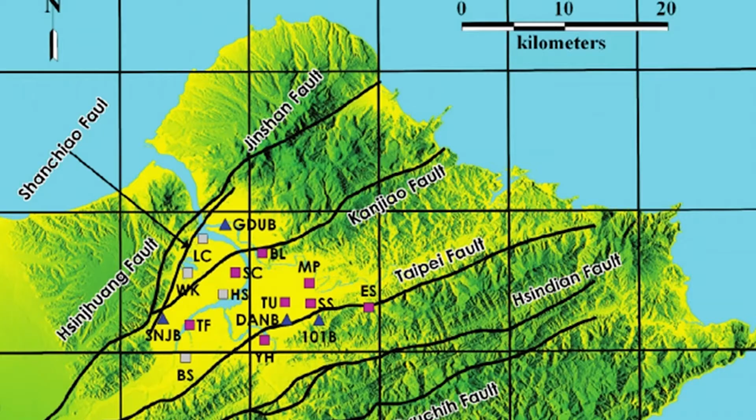Taipei City is an inhospitable place to build a skyscraper. Beneath the earth, a thick layer of soft clay demands a uniquely designed foundation, while above ground, the threat of two of the most powerful forces of nature, earthquakes and typhoons, require a level of engineering and construction never achieved before. Taipei 101 was the only super tall building in the world designed in a seismically active zone.

Our team has been studying this next level of engineering and construction technology over a semester, about how engineers confronted the power of nature. Today, we are going to go through the design issues one by one, from design to the completion of the building. Let's start with the seismic design.

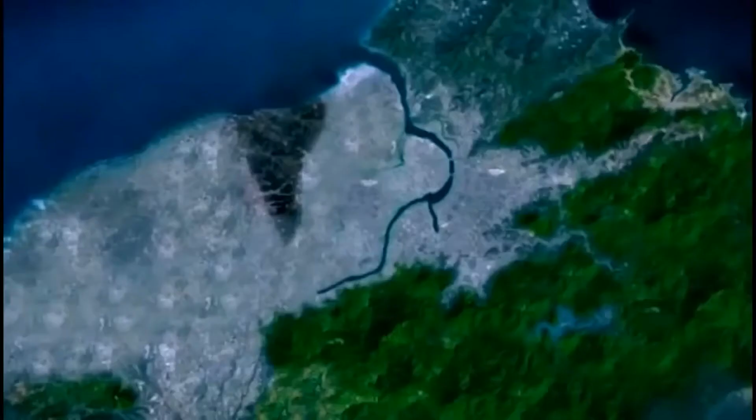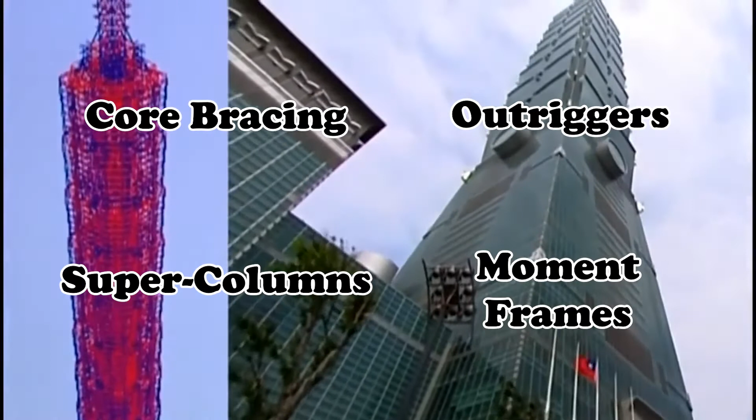Keeping the location of Taipei 101 in mind, it is easy to see that earthquakes were a worry when designing the building. To overcome this, Taipei 101 ended up having special structural members compared to ordinary buildings: core bracing, outriggers, super columns, and perimeter moment frames with reduced beam sections.

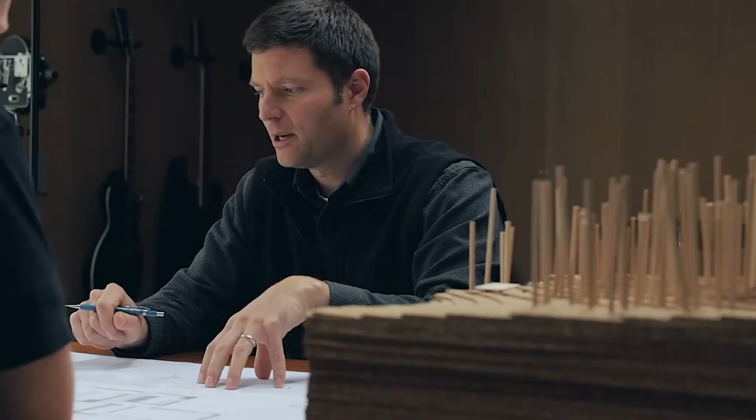Bringing such a tall building into reality was a challenge at that time, and engineers had to figure out new ways and combine methods to successfully build Taipei 101.

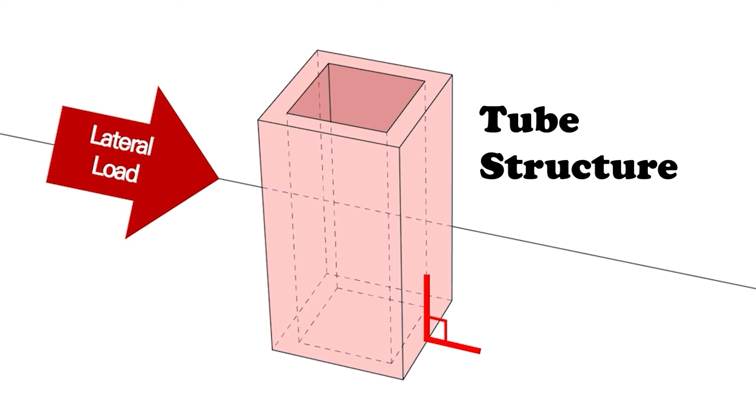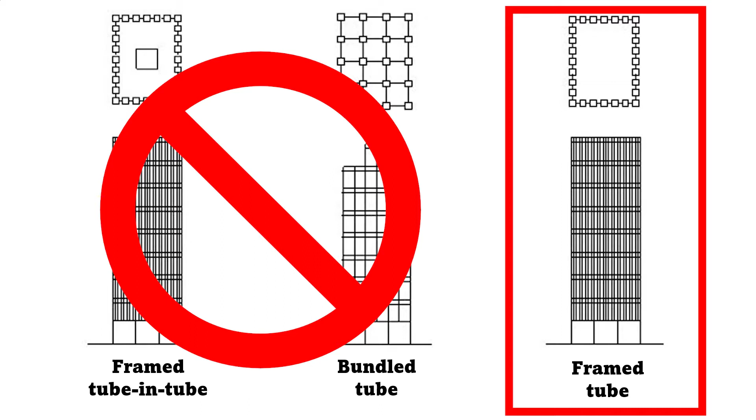The first structure they thought of was tube structures, which were highly reputed for resisting lateral loads in skyscrapers. There are mainly three types, and the first two were eliminated since they took up too much space inside. So the one that was left was the framed tube system, and it was nearly considered the best, only if three major drawbacks when applying this to Taipei 101 were solved.

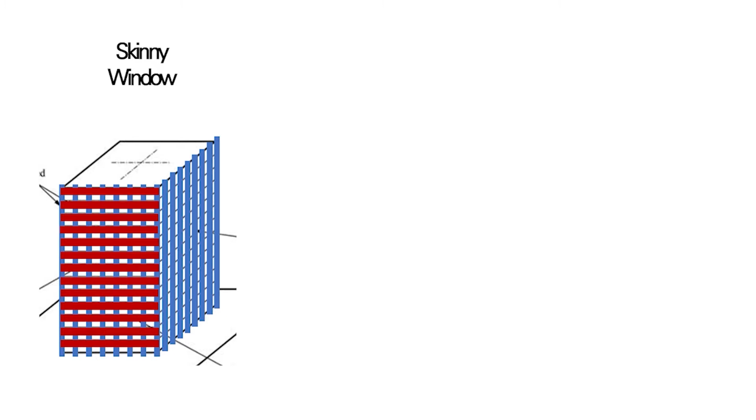These drawbacks were: blocking the wide glass expanses desired by the owners, requiring indirect load transfers at the setback atop each module, and involving intrusive internal beams to connect building faces across the sawtooth corners, which will be explained later.

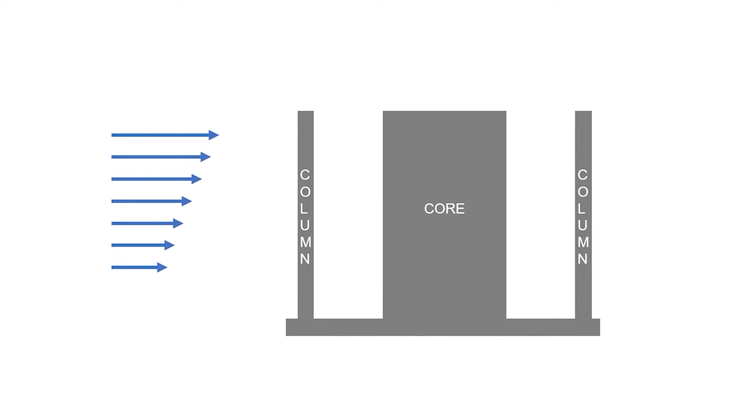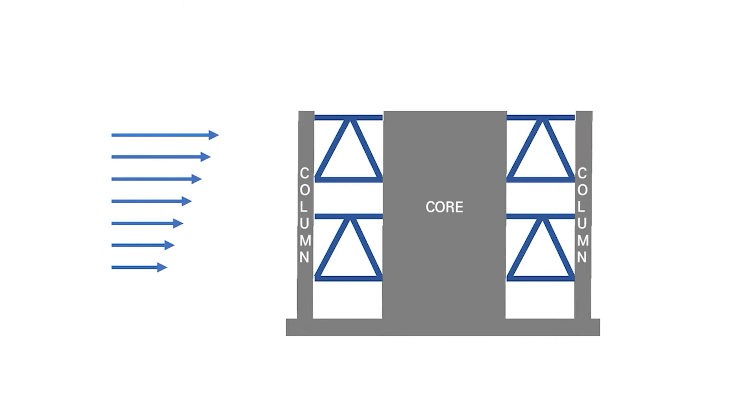To overcome these, engineers came up with a system including outriggers. Generally, when a building is exposed to lateral forces, it bends in the direction of the force. However, if an outrigger is installed, it resists rotation of the core by improving stiffness and reducing overturning effect, which reduces lateral deflection of the core.

This outrigger system solved not only the problems that framed tubes had, but also made it possible to change the shape and inclination of the exterior skin.

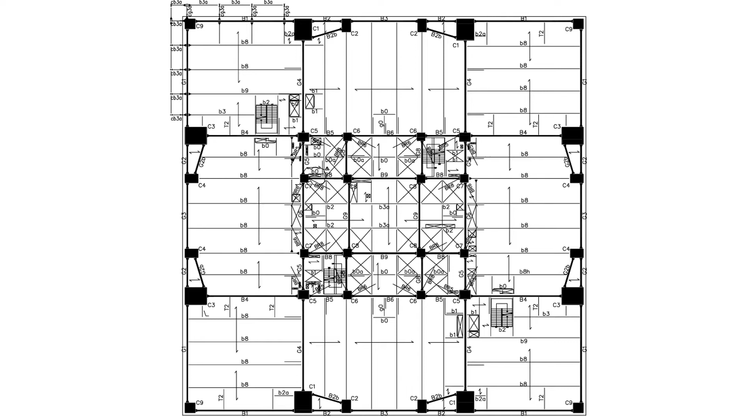Two more structures were used to bring this to reality: core and columns. In the case of Taipei 101, the core exists as a special concentric braced frame. It is the kind that focuses more on ductile behavior and inelastic deformation, which is key to preventing the collapse of the building against earthquakes.

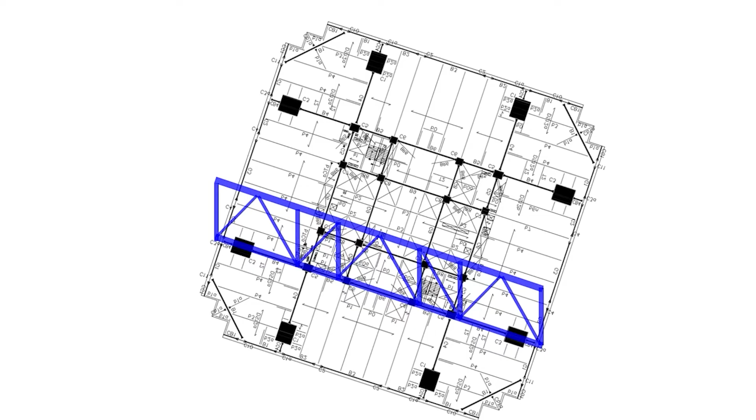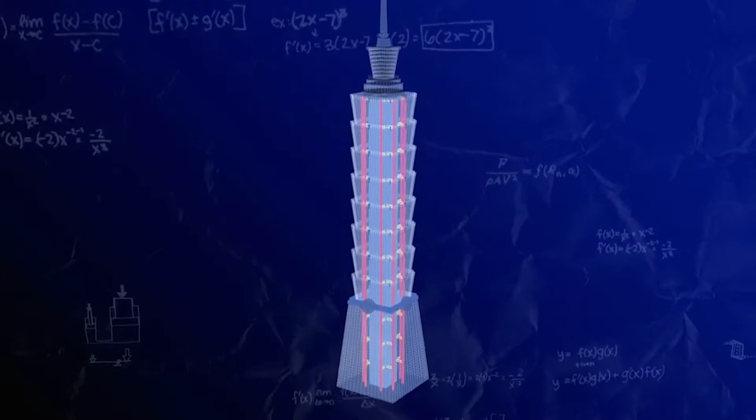Super columns take place along the perimeter, connected to the core and directly to the outriggers. In addition to this, an ordinary-looking moment frame is used.

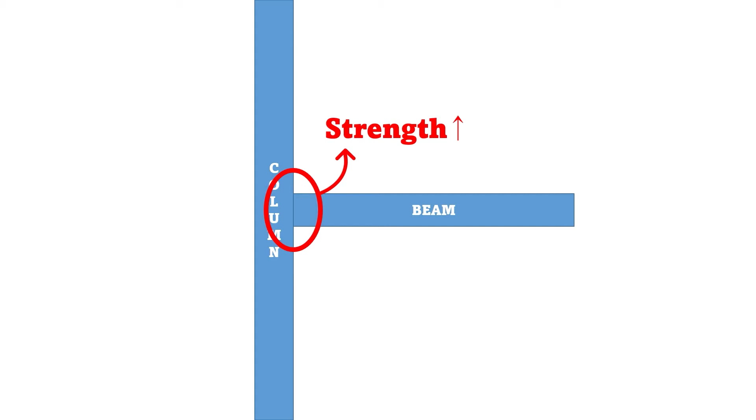A strong earthquake causes plastic hinges at the end of the beam in a fully restrained moment frame. So usually, to counteract these plastic hinges, the strength of the beam-to-column connection is enlarged. But since this method costs too much, Taipei 101 applied a dog-bone beam, reducing the beam section.

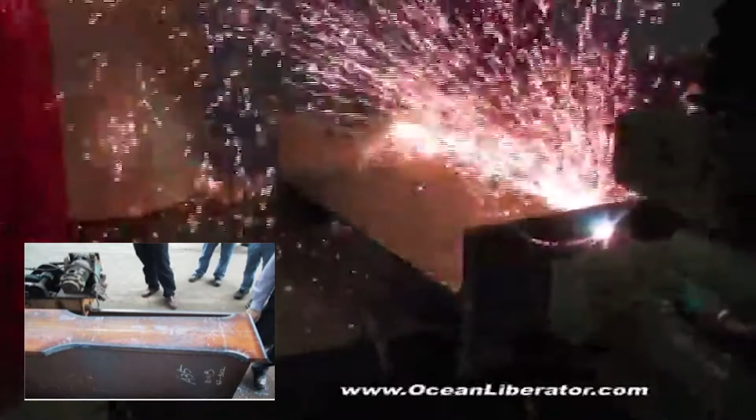It might seem counterintuitive that removing a portion of the structure improves performance. But the dog-bone results in only a small reduction in lateral strength and stiffness of the frame, and provides a large increase in ductility, the key to surviving strong earthquakes.

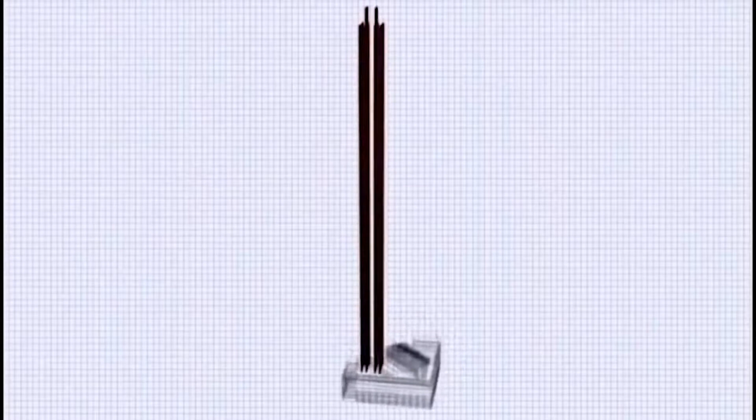One big structure, consisting of braced core, outriggers, and super columns, is grouped as the megaframe, the one I mentioned earlier. The braced core and perimeter moment frame is called the special moment resisting frame. Building to the height of Taipei 101 requires not just one, but both of them, as a dual system.

In Taipei, the environment that needed to be handled was not only seismic problems, but also the wind. When you put a tall building on an old secondary earthquake fault line, which runs nearby here, and in a place where you get significant typhoons, that just has major challenges.

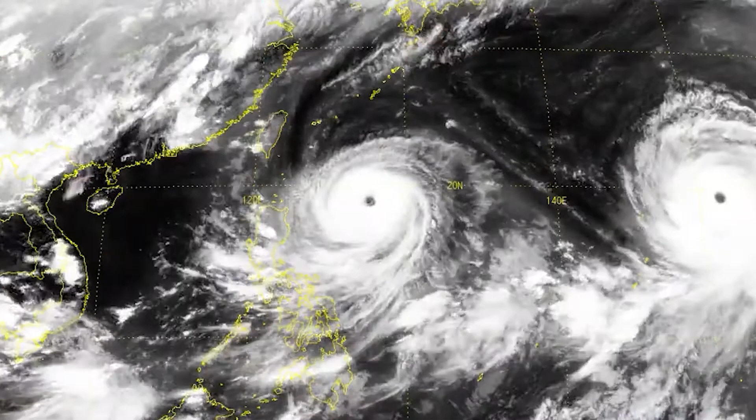Taipei 101 is influenced by aggressive typhoons generated on the equator every year. Typhoons accompany strong winds up to 200 kilometers per hour. Not considering it carefully, the building might be in danger under the threat of wind.

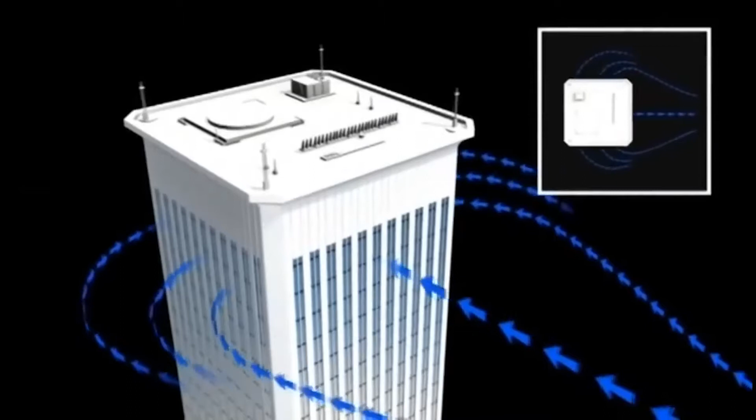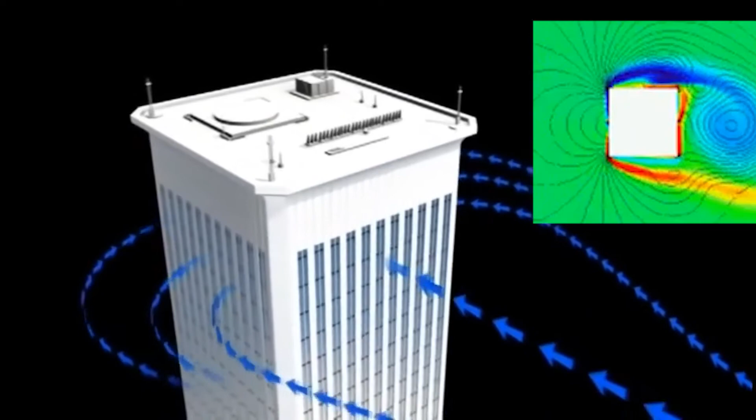When a thin, long building like Taipei 101 comes across wind, spiral-shaped airflow, called vortex shedding, causes a building to sway in a perpendicular direction of it. When the frequency caused by the vortex shedding becomes equal with the natural frequency of the building, the magnitude of the sway increases amazingly. In general, we make the structure very stiff against wind.

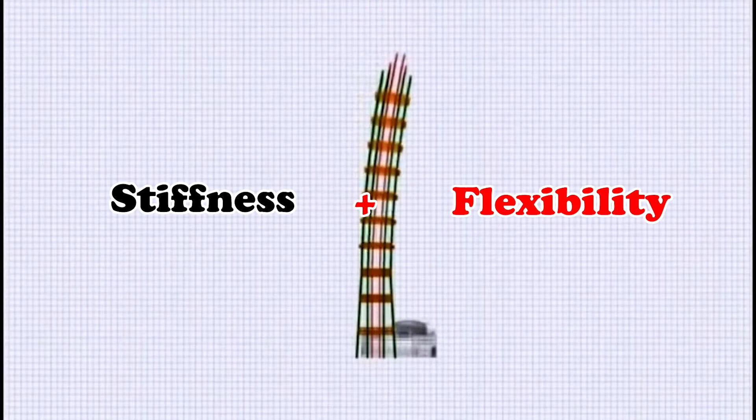But in the case of Taipei 101, it also must be flexible enough because of the earthquake.

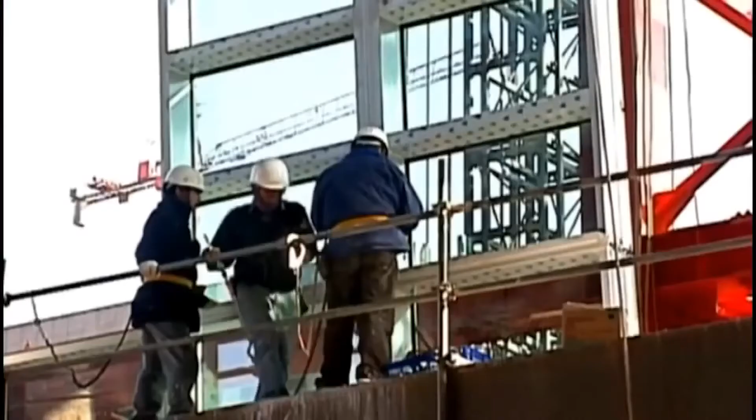The engineers came up with an idea of redesigning the exterior of the building. Designing the facade aerodynamically, they could restrain the influence of the winds to the tower, including vortex shedding. The softening corner method was applied between the aerodynamical designs, sawtooth, and a double notch. It reduced crosswind response effectively, showing a 40% reduction in wind force.

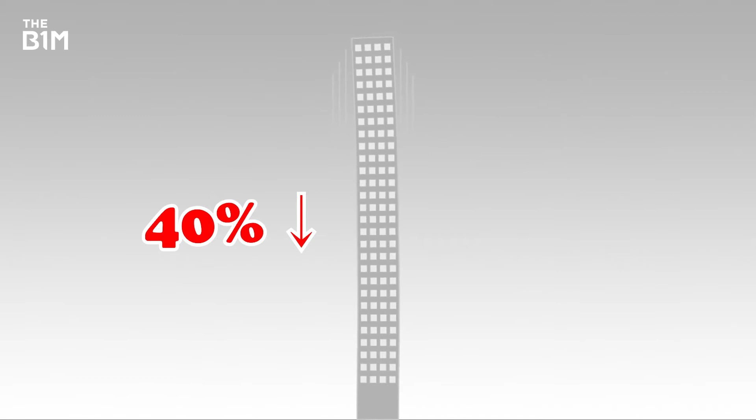Although the influence of the wind reduced, the energy grows while the sway builds up. To prevent the energy building up, a tuned mass damper, TMD in short, is used in Taipei 101. It is extremely heavy, weighing 660 tons.

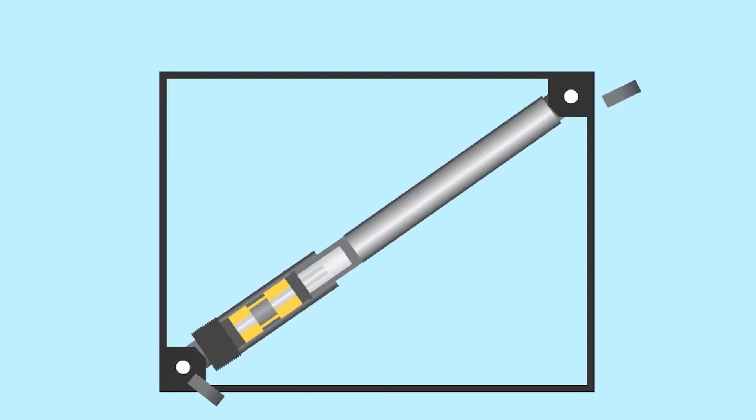This massive damper acts exactly during the same period and exactly in the opposite direction. The reversed movement of the tower and the TMD cancels each other. Under the mass block, the eight viscous dampers transfer the kinetic energy to thermal energy. By even controlling small vibrations caused by the wind, it presents comfort to users inside.

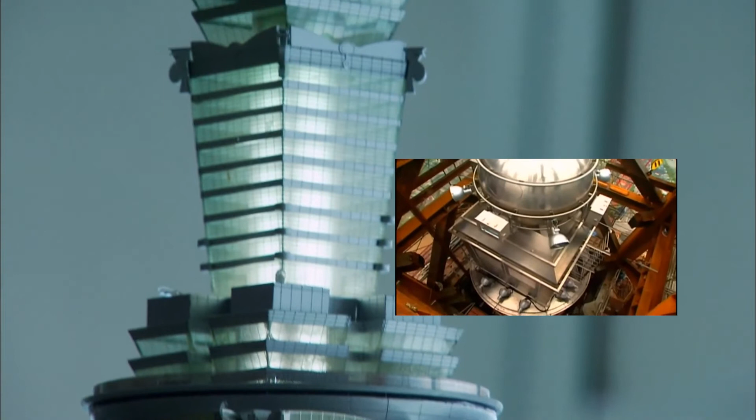Additionally, two small versions of this tuned mass damper, following the same principle, are located near the pinnacle, preventing wind fatigue on the steel frame.

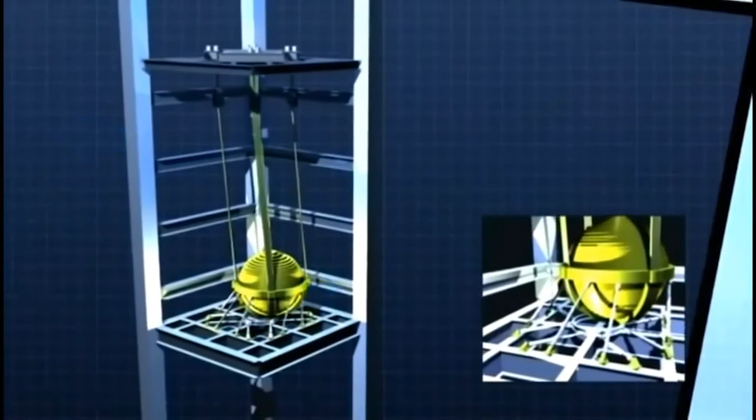Taipei 101's unique megastructure and damper resist earthquake and wind shakes. But all of this is meaningless unless a huge building has a solid foundation that exists on solid ground.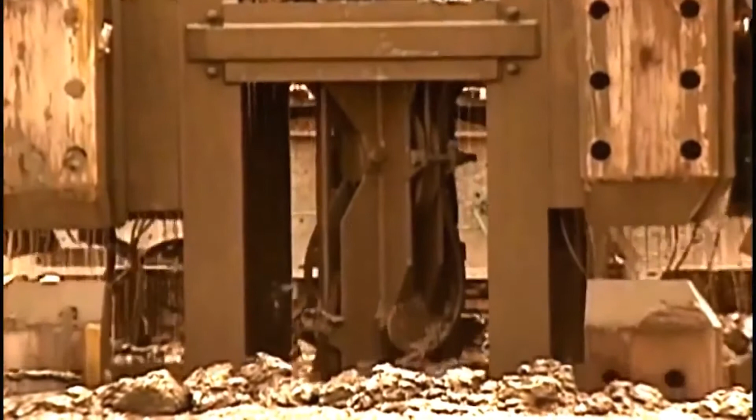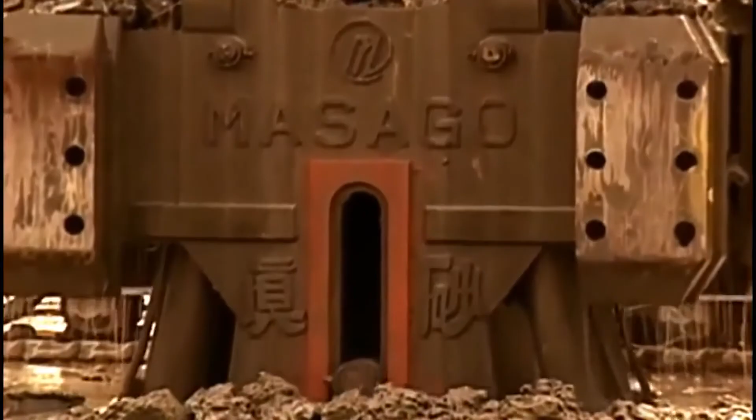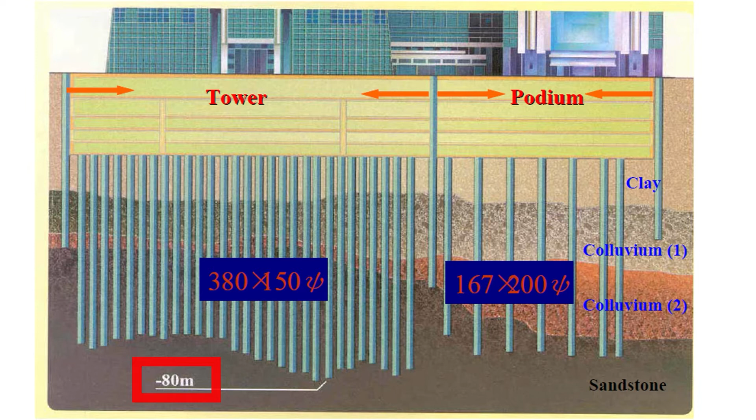Due to the change of the sea level over hundreds and thousands of years, Taipei Basin was filled with soft soil and clay. In order for one of the tallest buildings in the world to stand, it had to break through an 80-meter thick layer of soil and find solid rock beneath it.

As a result, it took 15 months to prepare the foundation alone, and about 700,000 tons of soil were removed from the site. It was designed to be held on underground bedrock due to the unstable ground, and it secured under 23,000 square meters of concrete slab through 380 reinforced concrete piles.

For Taipei 101, 3 types of foundation were considered: caisson, barrette, and large diameter bored piles. They all show high resistance to large lateral loads. However, among these, bored pile was chosen to transfer the loads downward in Taipei 101.

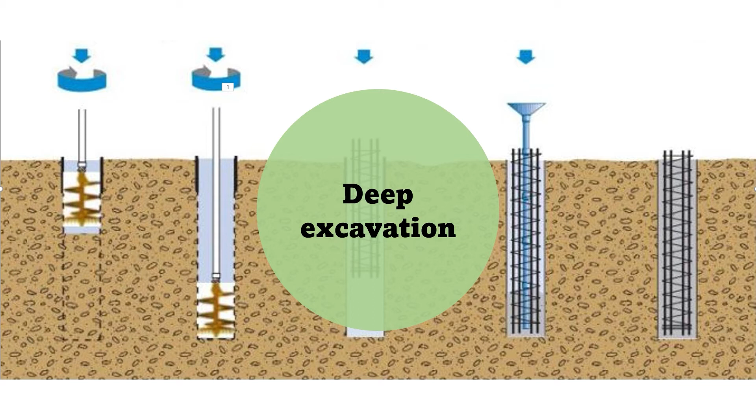Based on full local experience, deep excavation was easily achieved. These characteristics made the foundation much stronger.

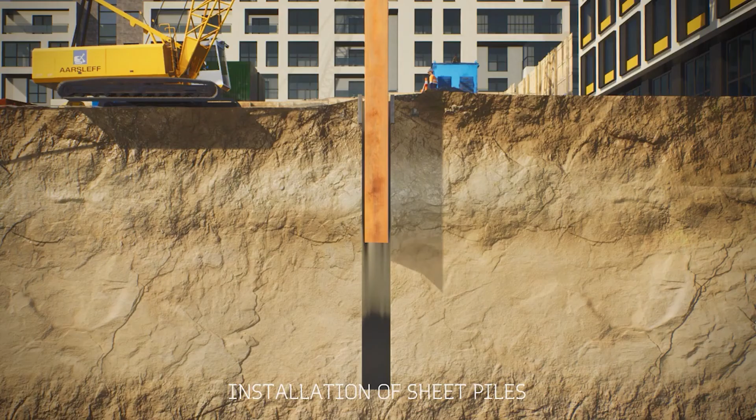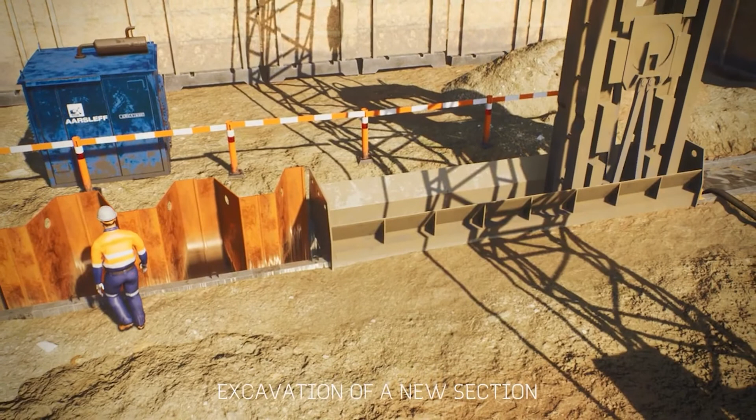And then, as a solution for the soft foundation below, slurry wall is used. Slurry wall was an on-site laying pile construction that uses a stabilizing solution to excavate the ground and form a continuous reinforced concrete wall inside the ground. It prevents not only water, but also the collapse of soil during construction.

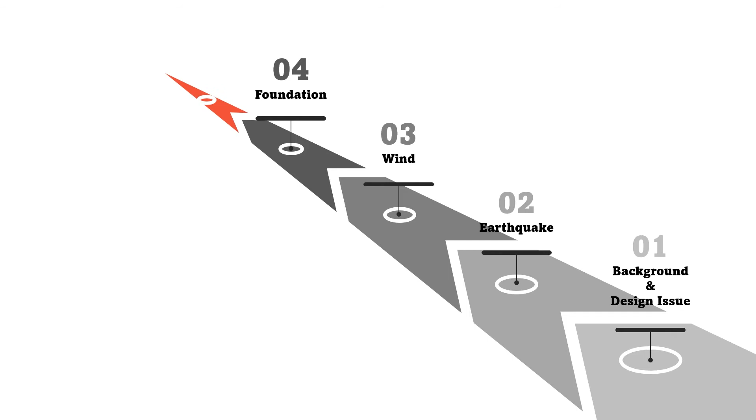So far, we have identified issues in the design of Taipei 101, and now we will deal with the construction process and related issues.

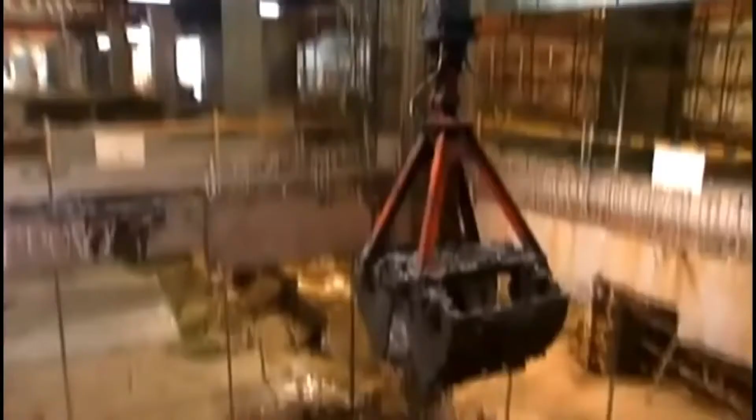The construction of the main megastructure of Taipei 101 began in September 1999 after the foundation was firmly established with slurry walls and bored piles.

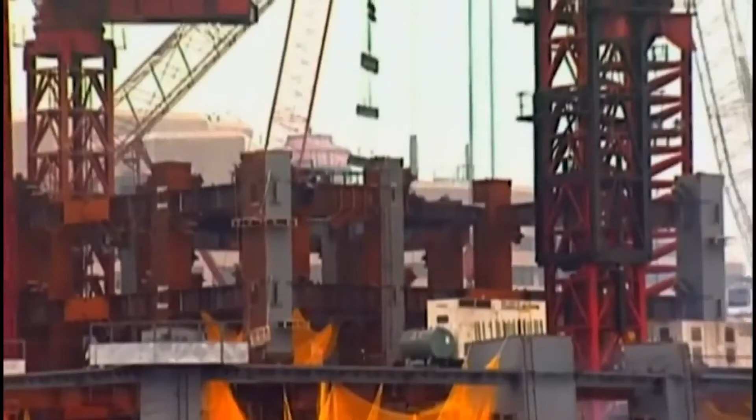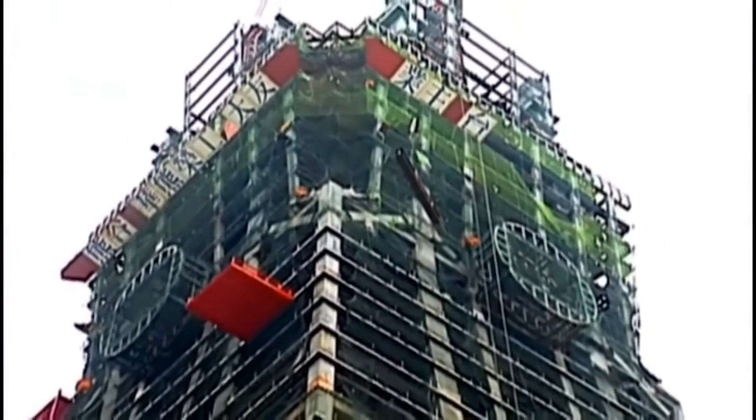The main megastructure was designed with a concrete-filled steel tube, which had to be weldable, rigid enough to withstand the massive volume of the building, and flexible enough to not fail when shaken by earthquake.

Because each of these factors requires different types of steel, Taipei 101 used 5 kinds with specific flexibility and strength ratios, which were designed for the purpose and location of the building.

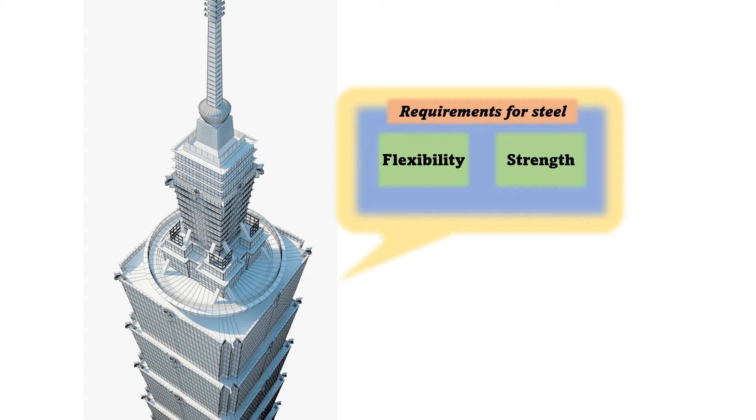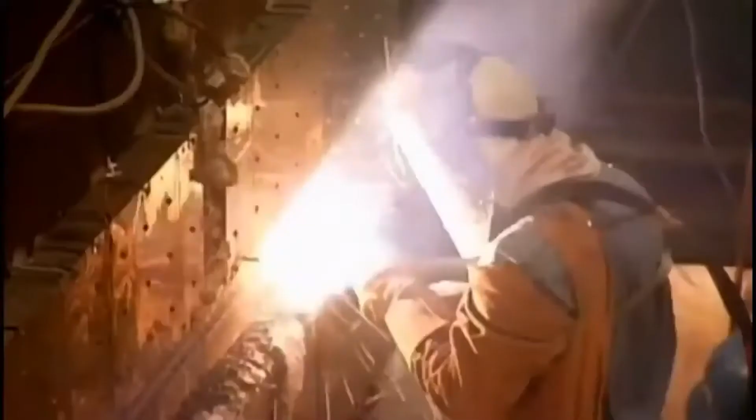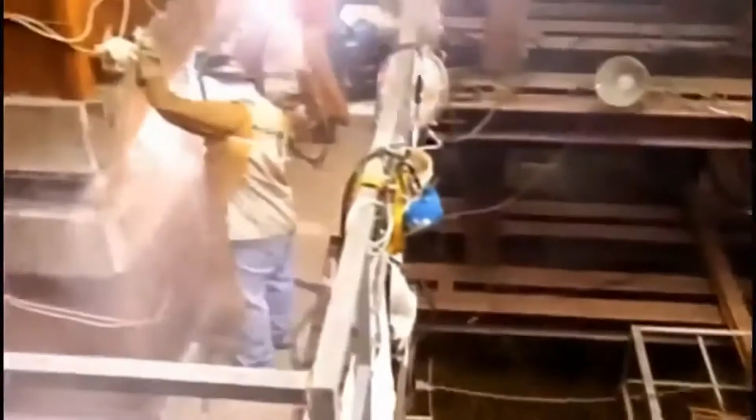Each super column box section took 4 months to make, and each one had a total of more than 400 joints, 50 of which required enormous work to combine into one seamless unit. It took at least 14 hours to join each joint, and work continued for almost 2 years. These long hours of effort led us to a robust and flexible super column that can withstand earthquake waves.

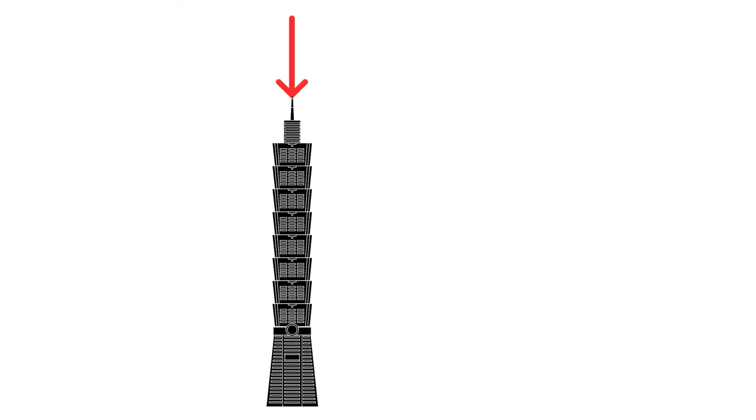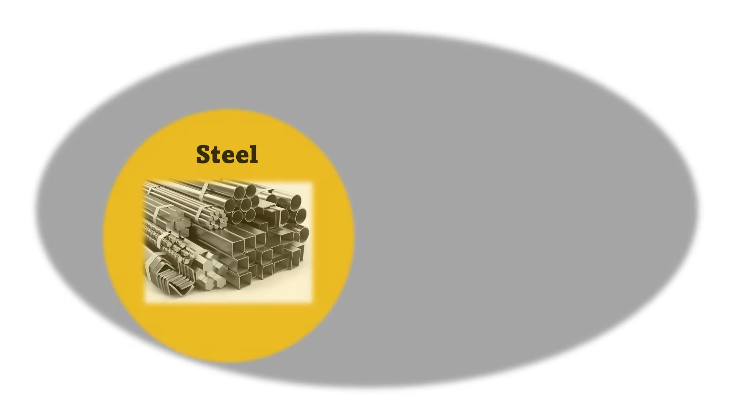However, the super steel column was not enough to withstand the building's immense weight. To prevent this huge compressive load from making the steel structure sink, the middle part of the steel column was filled with concrete. As a result, the tensile strength of steel and the compressive strength of concrete were combined to complement each other, completing a more stable structure.

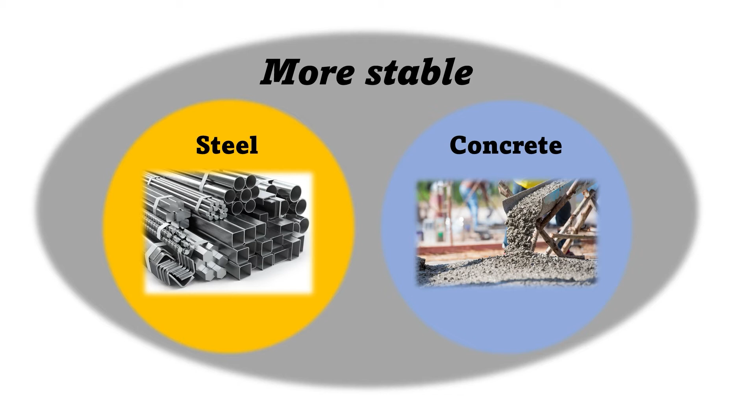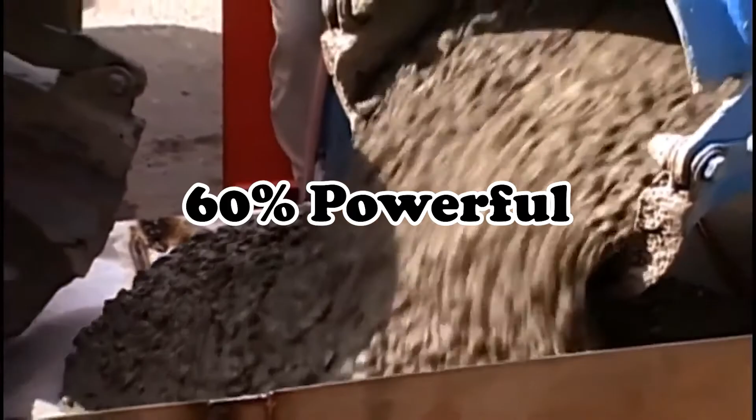In addition, technicians of Taipei 101 developed a concrete mixture that was about 60% more powerful than the conventional one, and it was used to complete the backbone of the tallest and most stable building on Earth.

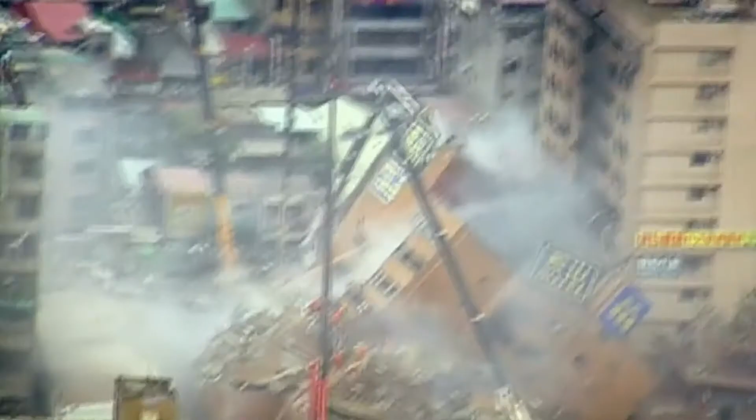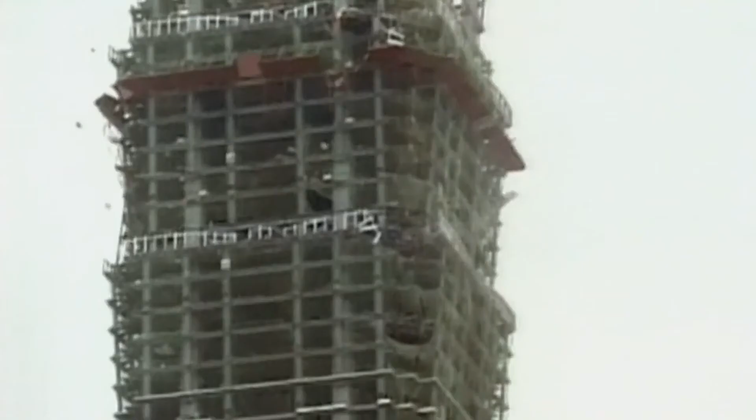At 8:03 local time on 31st March 2002, an earthquake of 7.1 on the moment magnitude scale struck Taiwan. The epicenter was offshore from Hualien, located 135 kilometers away from Taipei. It wreaked havoc on the construction site of Taipei 101, and construction cranes toppled 240 meters to the ground, resulting in the miserable death of 5 workers and injuring dozens more.

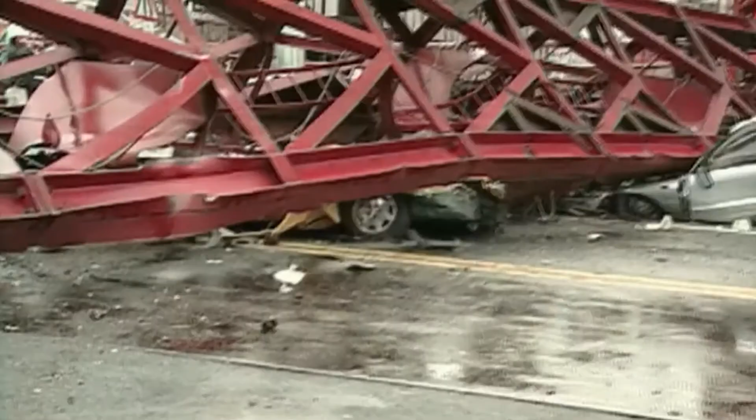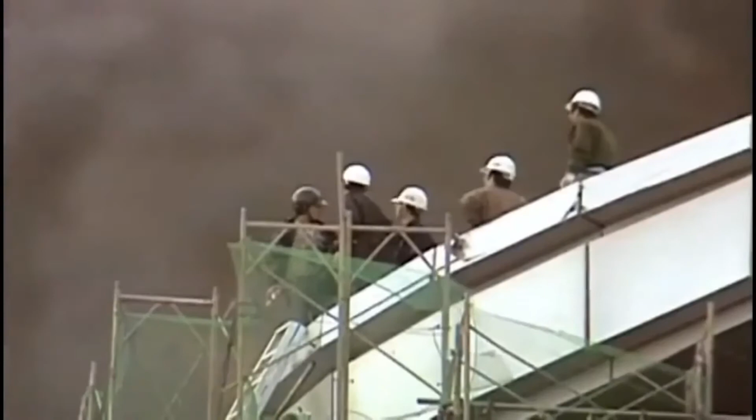Immediately, all the work was pulled to a stop, and engineers and surveyors began to look for any structural damage on the building. The survey, which was expected to last 4 weeks, was conducted for 3 months due to continuing aftershocks.

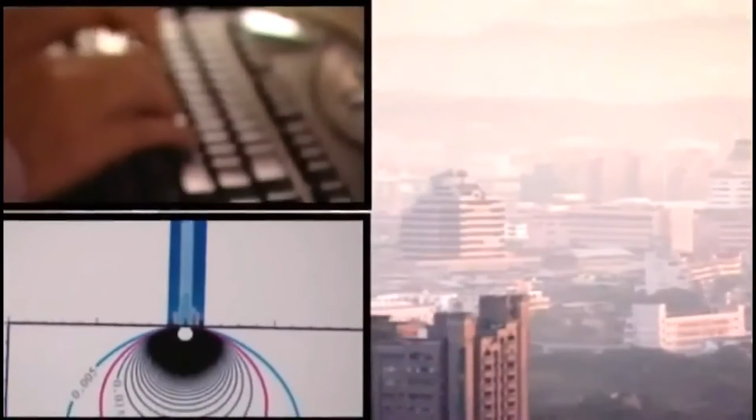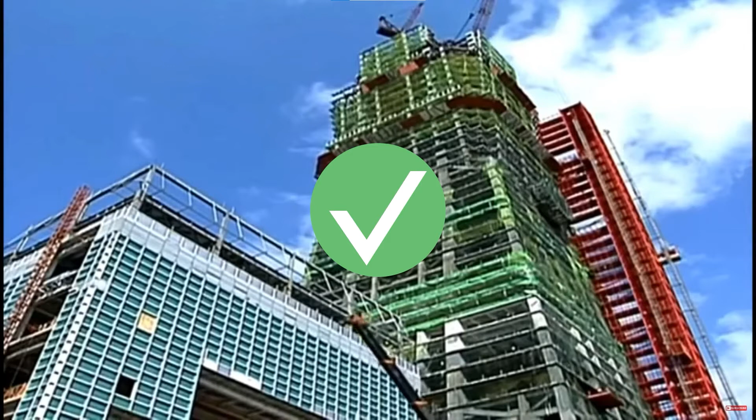Finally, in July 2002, engineers and surveyors diagnosed that Taipei 101 was intact in its internal structure and could resume the work once again.

Although permission to restart the construction was acquired, Taipei 101 still had one problem to solve: the cranes. Since 2 cranes fell to the ground during the earthquake, new ones were needed, and reinforced structures had to withstand the threat of earthquakes.

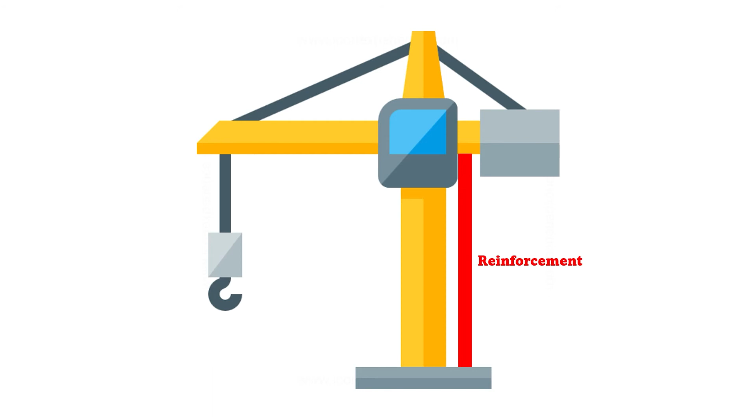Therefore, work was carried out until September to install the cranes and to reinforce the existing cranes to have capability against earthquakes. After that, the erection resumed.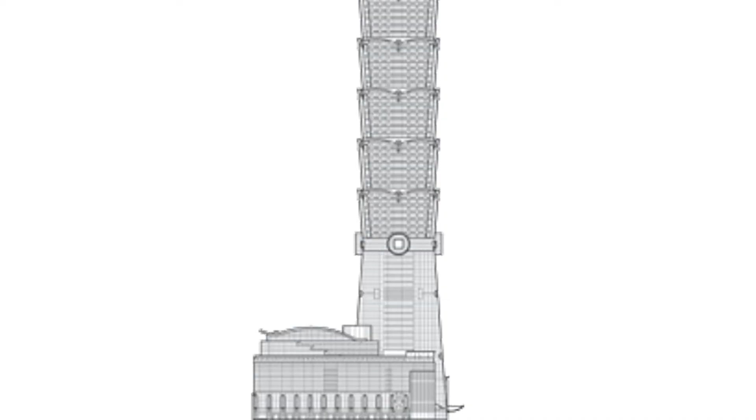In July 2003, construction was carried out to the 92nd floor. It was almost completed, but Taipei 101's mascot, the tuned mass damper, was yet to be in place. The tuned mass damper, as mentioned earlier, is the building's most important windproof structure, designed to counteract the horizontal sway of a huge building.

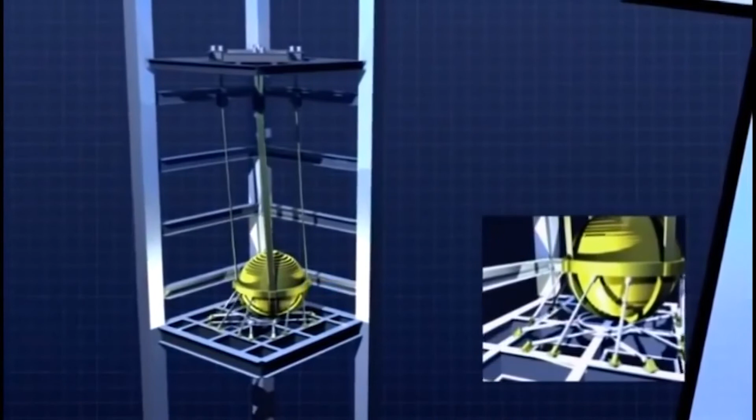Mass dampers have been used in high-rise buildings before, but this was the very first time in its shape, size, and height.

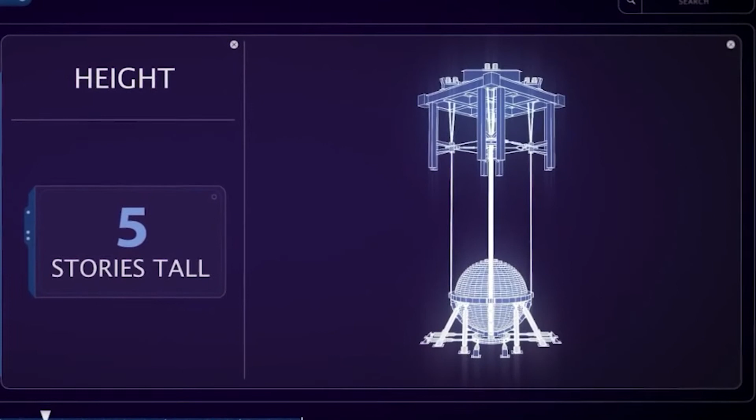In order for the damper to perform its proper function, it must be 1/10 of the total mass of the Taipei 101 building, which was a massive weight, nearly 660 tons.

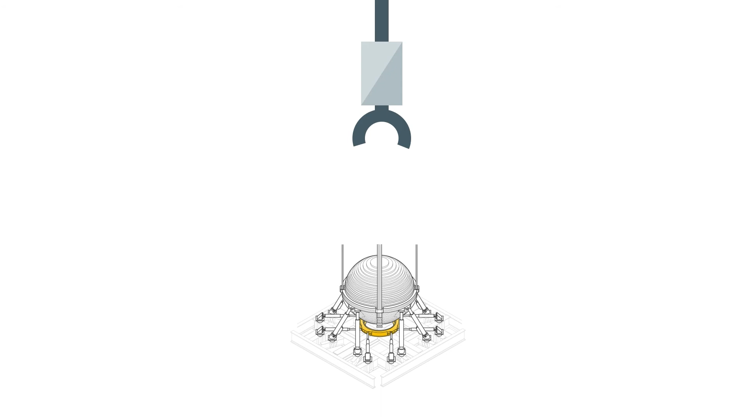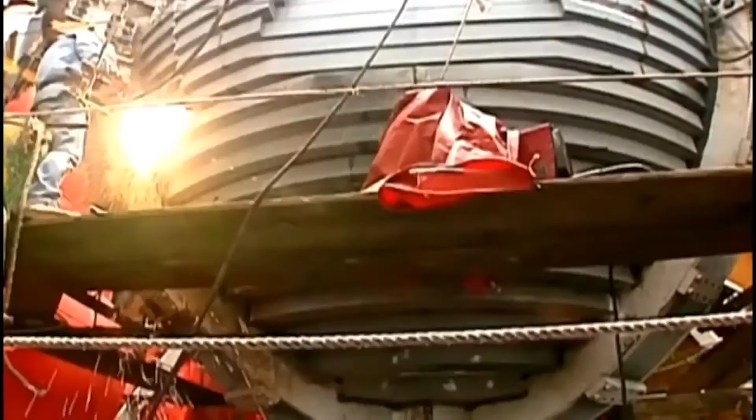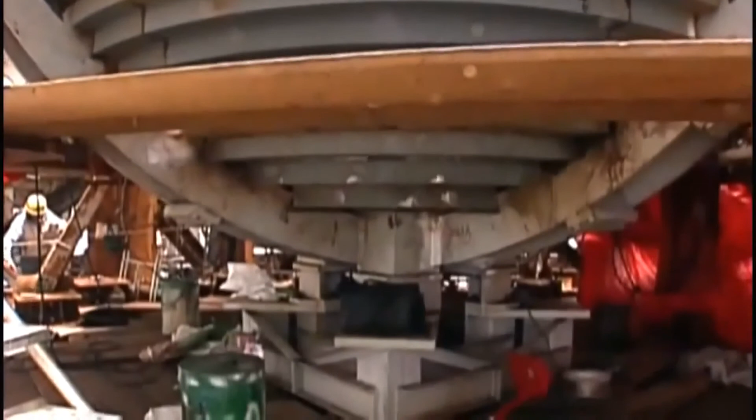Most of the building was completed in December 2004. The building that had been built so far was great, but it was 4 meters short to set a record.

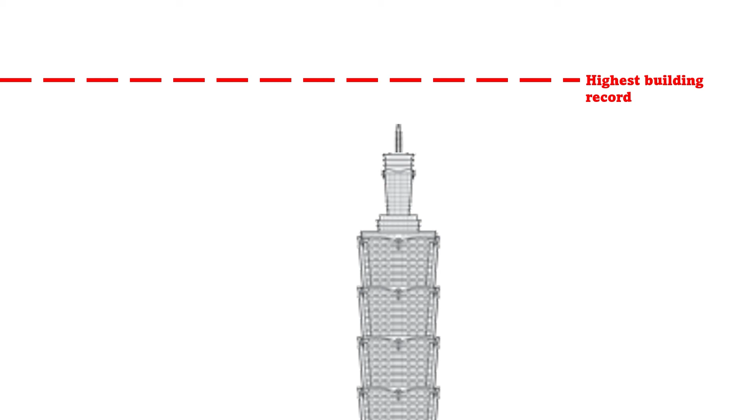Successfully raising the pinnacle would give it the title of the tallest building in the world, but the weight of the pinnacle was by no means light.

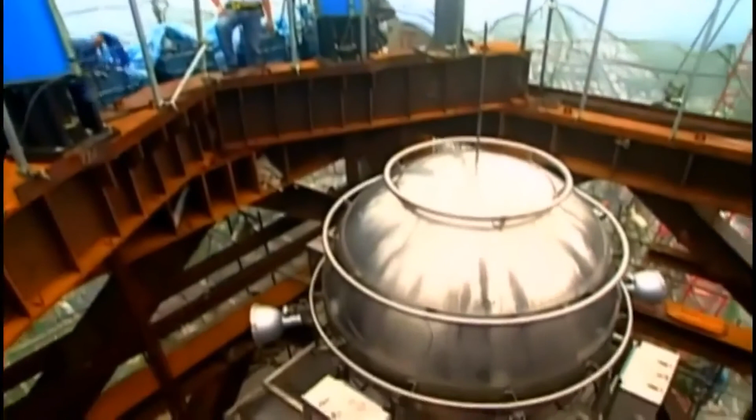Like the TMD, lifting a pinnacle of this size and height was an unprecedented, dangerous, and difficult task. A system of hydraulic jacks and geared cables lifted the massive structure from its base.

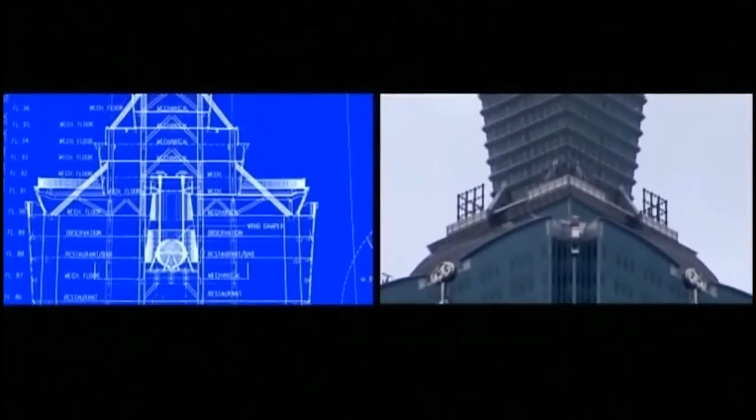14 days since the work started, the pinnacle was perfectly fixed at the top of the building, finally ending a 5-year-long journey.

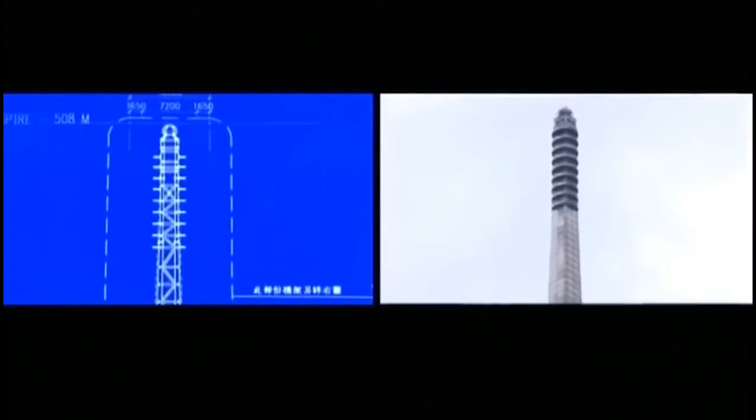We are now finished looking through the building from design to completion. The Earth was the biggest, most overwhelming enemy for Taipei 101, but the engineers took over and succeeded in making this super tall skyscraper.

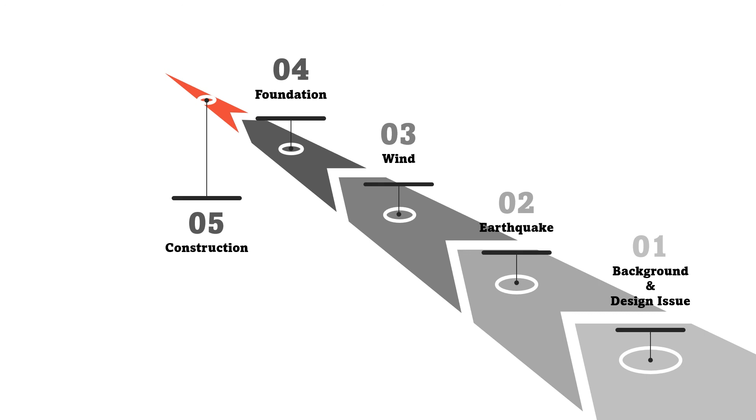Inside and out, Taipei 101 pushes the boundaries. A unique-looking building changed the face of construction design and engineering for good. It has become a symbol for the future that took on nature and won.